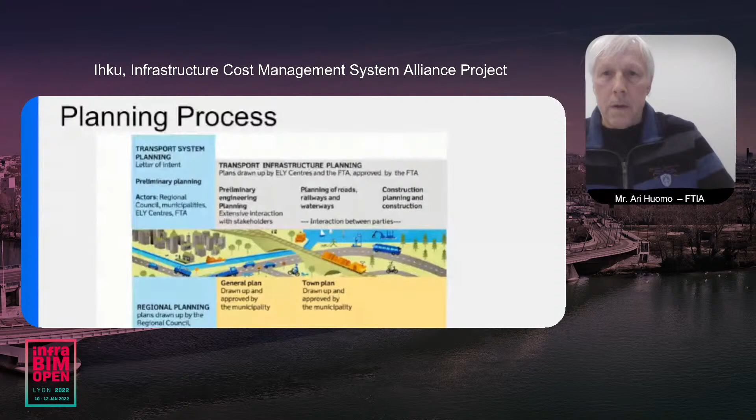Connection is not the best at the moment. Doesn't know how to put down his video. Is it all right now? It's better now, yes, I think it's better now. Yes, just continue please, sorry.

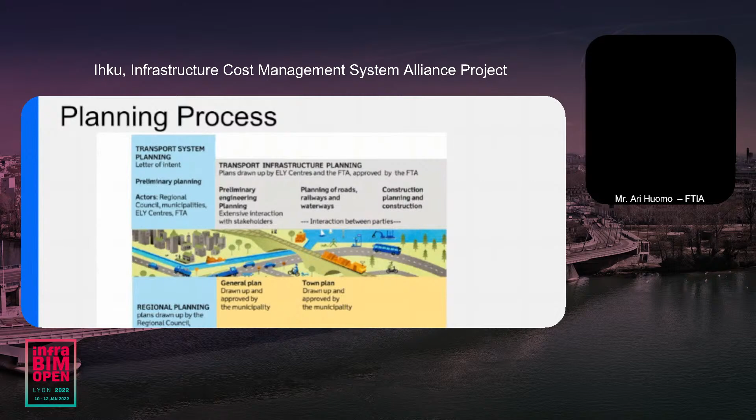I continue, yes. So we got those four phases that are separated from each other, and when we start cost estimation, we start all over again. For example, for financing, the purposes are a little different, and the initial data is a little different, and that kind of stuff. And that is one problem.

Then I go to the principles of our solution. So the first thing is that we want to have a solution that we can have continuous cost estimation throughout the whole planning process.

Structures are all based on resources that are needed to implement the project. So we are resource-based, our calculation is very strictly resource-based. And it tries to simulate how the project is implemented on site, for example, how contractors do the work.

And of course it is based on standards, for example nomenclature, so that we can have compatibility with other systems. That is very important to us.

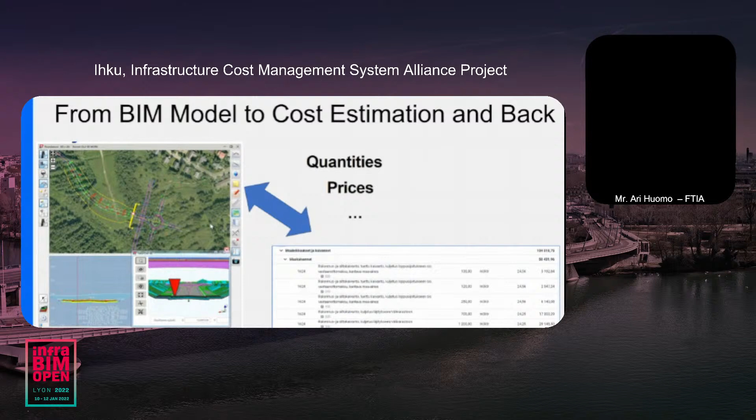On the next slide, maybe the same thing in different words. The connection to BIM models makes real-time cost estimate possible. We believe that is the way forward. We can move quantities from model to Ihku and also backward, and we can do the cost from Ihku to model, the infra-model.

And the most important thing is that this work is the standard. You've got the infra-BIM classification, the infra-BIM information format, and that is where we must have some development, especially in the data transmission format. They are not good enough, they don't move enough or exactly enough data from part to part. So that is where we work.

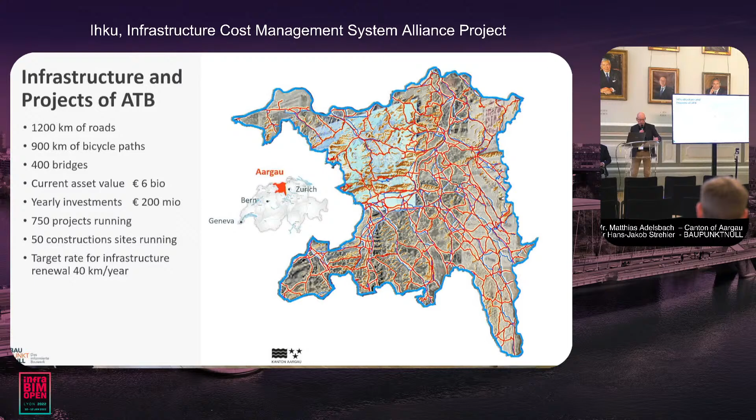This leads me to the strategic goals for digitization. One, of course, is the renewal rate, and it's one of the most important strategic goals of the ATB, and we want to significantly increase it.

But there are others. As we live in a relatively densely populated area with high traffic volume, one of our biggest challenges is to ensure we have enough qualified professionals with experience in planning and construction. Unfortunately, our culture of working together is often characterized by harsh claim management, which isn't helpful in encouraging young people to start a career in our field.

And finally, with better information about our infrastructure, we want to be able to manage our planning even better. In addition, digitally available information should help us make our construction processes and the use of resources more sustainable in the future.

In Switzerland, there's still a traditional division between planning, done by engineering companies, and construction, for which the construction companies are responsible. This leads to processes of planning and construction with many breaks in between.

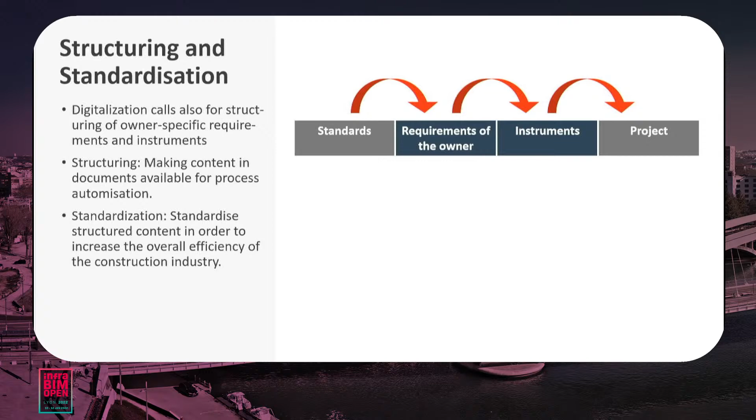To apply standards to projects in a similar way, ATB has created its own practical standards and instruments for use in project realization. For digitalization, it is essential not only to create and structure models in the sense of a 3D image of a building, but also the associated information, which probably for a long time to come is created in the form of documents—organizational charts, quality reports, or static calculations. From ATB's point of view, information from these documents should be linked to the corresponding model element. Redundant data should be avoided, and its quality should be checked automatically in a similar way as models.

ATB uses an approach in which information is divided into three levels: project, structure, and information model. Information is assigned to a level. Organizational charts, for example, are assigned to the project level and are managed there. This means they do not exist at the information level and are therefore not included in documents such as the BEP. The organizational chart is only referenced in it.

With this chosen procedure, a clarity of thought is created that allows further automation of ATB internal and project processes. From ATB's point of view, standardization serves to increase the efficiency of the entire construction industry. However, the current status is far from being sufficient for effective digitalization.

And now Matthias is taking over for the market and relationships.

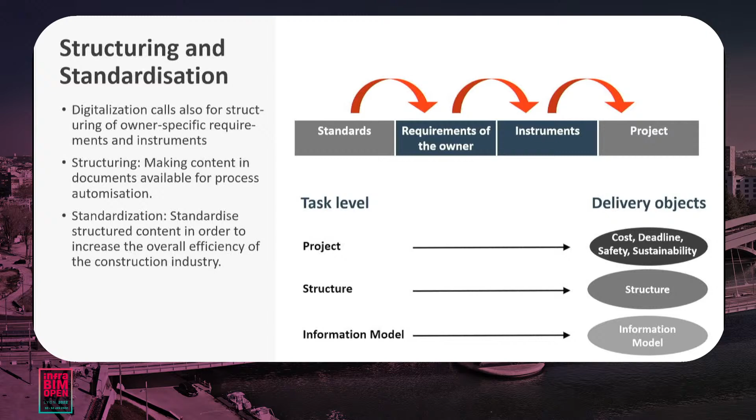Thank you, Hans-Jakob. Besides these technical aspects Hans-Jakob mentioned, there are some other aspects we have to keep in mind when we are talking about BIM.

First of all, it's the contractors. The market of contractors in our region is not very big—we have about 25 contractors working for us, almost all of them mid-sized companies. And we have about 40 engineering firms working for us in civil and structural engineering, most of them with between 10 and 30 employees.

Some of our contractors are very active with BIM. Usually these are the large companies with the necessary human and financial resources. However, there are also some small innovative companies that already started using BIM a few years ago. The vast majority of our contractors, however, are only slowly approaching the topic of BIM.

We notice mixed feelings regarding BIM. Some contractors show great enthusiasm for it, others are more skeptical. We have to take these uncertainties and fears seriously, because we cannot afford to lose many contractors as a result of BIM. A lively, competitive market must be in our interest for the future too.

There's another topic: our employees—on our side, but also on our contractors' side. Besides being attractive for companies working for us, we all have to put our efforts into increasing the number of young people starting a career in engineering or construction. We rely on them, as we need qualified people to manage all the changes and challenges we are facing, and we need them to implement BIM in the future.

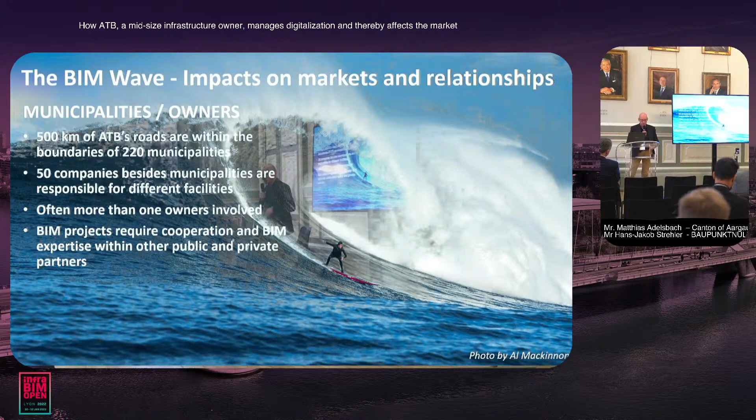So, coming to the findings, or our results so far: for a public owner, the renewal cycle of our infrastructure is important. Digitalization can help us to increase our renewal rate. Whether it will also help us compensate for the lack of qualified professionals is probably more uncertain.

BIM is just one part of digital transformation, as we have to deal with it also in other parts of our public administration.

Working on our projects for the last three years, partly with BIM, we now know that pilot projects help us develop solutions for our work cases. A fast implementation of what we have learned in our daily routine might be an important success factor.

And we depend very much on OpenBIM and a fast progress in standardization. Last but not least, the exchange of experience also with other builders will be an important topic for us in the coming years.

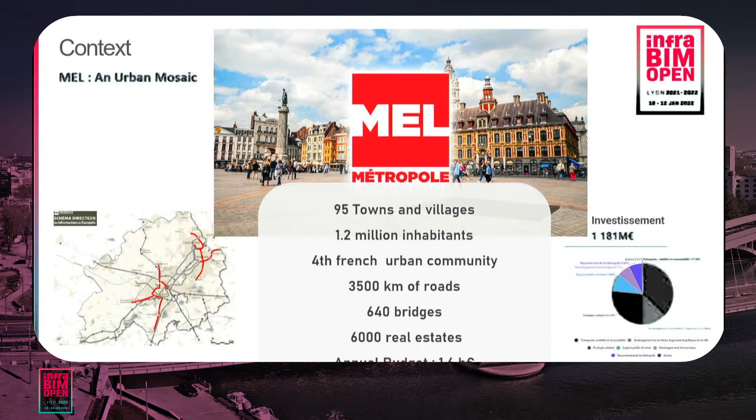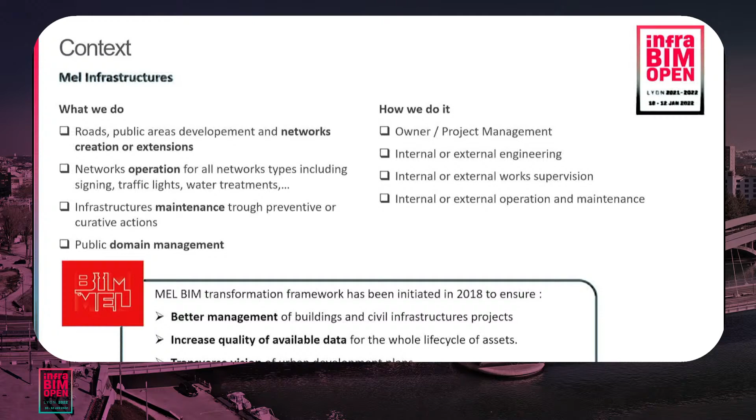For all these projects, the scope of MEL is pretty large. First, we manage roads, transportation, public areas, utilities, and public domain. So there's a large scope of involvement, and on this type of project or operation, we can be the owner, we can manage internally the engineering or externalize it. We can internalize or externalize the work supervision, and the same for operation and maintenance. So there are a lot of scenarios, and this possibility to internalize certain types of intervention allows us to test, to experiment also the BIM regarding operation, regarding engineering, and what can be the cross benefits of doing BIM at different stages of the project.

To sustain all the policies of the MEL, we adopted a BIM transformation framework called BIM MEL, which has to ensure three main features, mainly to induce a change in information management along the project and along the operation and maintenance stage. So it's better management, increased quality of data, and to also ensure a transverse vision between all disciplines, all different types of domains we intervene on.

Just a slight picture of our strategy. I will not develop it too much, but as explained by the previous speakers, this type of strategy induces training of internal teams.

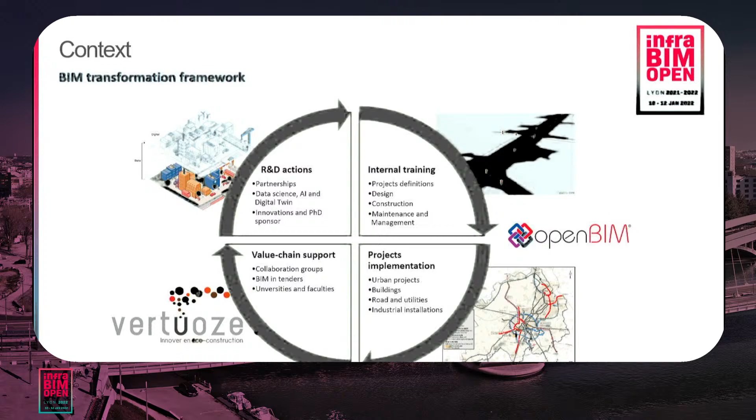So we have collaboration groups with local stakeholders. We ensure that in tenders we can mobilize expertise. And we are conducting also R&D actions like the works we are currently developing with the CSTB on digital twin or AI technology.

What kind of projects are we developing in BIM? We have currently 30 different projects. Part of this project are here.

So we have small streets, like 800 meter streets with some buildings just nearby. We have the plant, water treatment plant. We have urban projects, so the Lille Metropolis Gate. We have the Rue Solferino, which is one of the main streets of Lille city center.

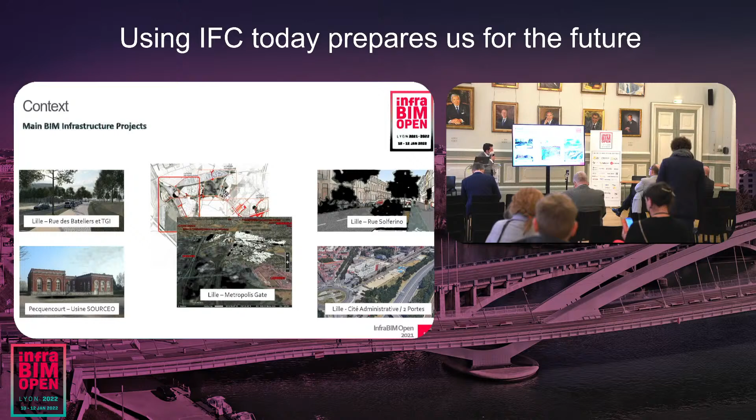And also some kind of mixed infrastructure, road and light rail project with the Cité Administrative, which is south of Lille. On all these projects, I promise my colleagues that BIM can give or can add value to their project.

We want to ensure that we have a better understanding of the existing infrastructures. We want to ensure better communication during the project process, and in the final stage of this project, we want to ensure that the operation and maintenance can have data about the constructed asset.

All these projects and the whole process we are developing is based on BIM, GIS, and all collected data that we want to make available for the project.

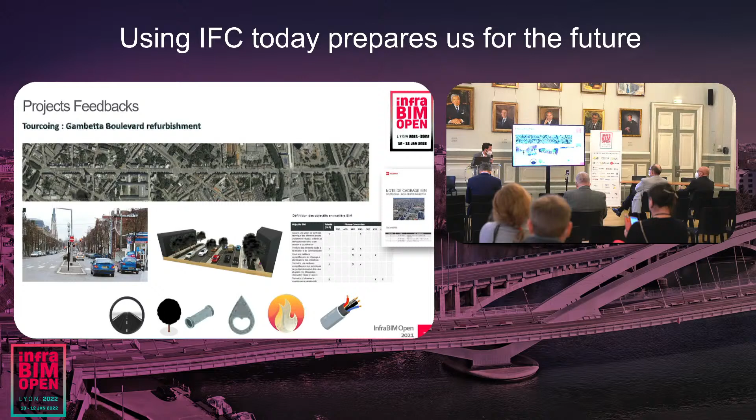Of the Boulevard Gambetta in Tourcoing, so it's one of the cities of the MEL, on which we implemented a BIM process. It's a 2-kilometer boulevard, which, let's say, traditional road improvement with a bit of landscaping, with trees, with sewage, with gas, and all utilities you can encounter in this kind of situation.

The objective of BIM for this kind of project is first decision making. In fact, when you talk with authority representatives, what they want is to decide and have a clear vision of what the project is and how the project will be once implemented. So that's what we want to manage and improve with BIM.

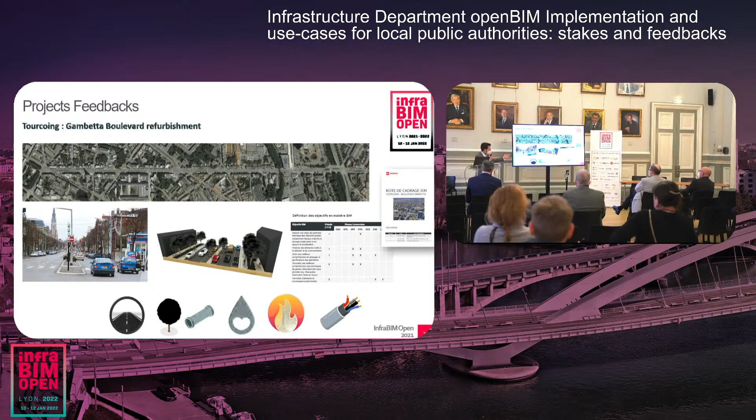Second is to manage design risks, mainly for utilities and underground structures. And then for this project, we wanted to improve the works staging and the impact of works on the actual road circulation along this boulevard.

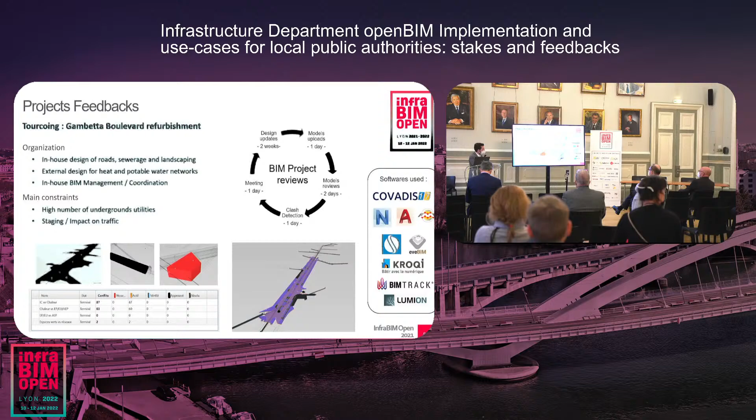To complete this project, we have also many other projects, but today I will speak mainly of this one. Just to give a slight view of the type of organization we can manage for this type of project: we have in-house design of roads, sewerage, and landscaping.

We externalized the studies for heat and potable water networks, and we ensured in-house BIM management and coordination. The particularity of this project is that internally we wanted to implement also, first, let's say, a process of BIM project reviews.

So it's not as frequent as we would like. It's only, we'll say, between 3 weeks and a month to update the models and make the coordination. But what we want is to increase this frequency, to ensure that we improve and have team learning on how to manage this data and that clashes and all issues regarding coordination are well managed.

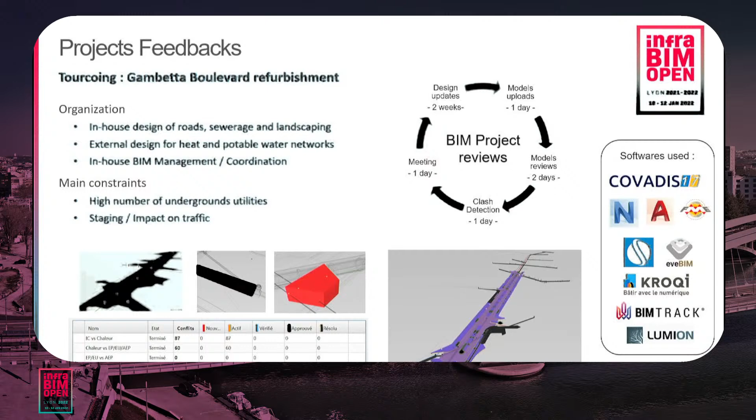We use very various types of software to ensure that. I will talk about GIS and BIM and then about asset data. First, about existing conditions and data collection.

The truth is that as a public authority, we have a large set of data that we can mobilize, including LiDAR, 3D meshes, and we have the possibility to acquire a lot more data. So data is not a problem in the sense of existence of the data.

The problem is when you want to use this data and when you want to have ready-to-design data. In fact, what we see is that more data doesn't mean more accuracy. The input quality and the use case defined when you acquire this data is very important.

And most of the time, if the use case is not well defined in advance, in fact, the data will be of no use, or only to ease early stage studies.

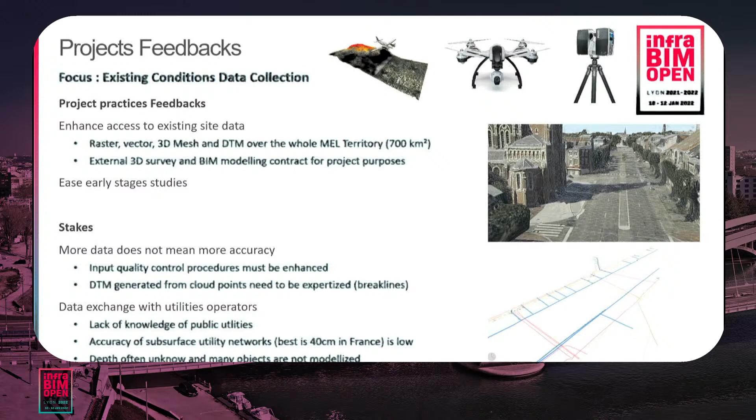And then the last issue is the cost. Sometimes acquiring data, especially complex data, is very costly. So if we make the acquisition, we want to give value to this data and ensure that we will not acquire the same data one, two, or three years later on. So it has to be capitalized.

Next subject, the link with GIS. Historically, metropolitan authorities in France have collected a very large amount of data, and now we have to think about how this system can evolve, to ensure we can use their data in our design or project management, and in return, how we can give them back our data.

The truth on this point is that import and export are both possible, but very tricky each time. If you want to import data from GIS into BIM, you will really decrease the level of structuration of the data when you make the export. And then you are not very sure that you will be able to give back the same information to the system. So we have this kind of problem with water utilities, for example.

What we would like is to be able to manage some kind of temporary GIS references between the objects, and to make this whole system truly linked, and truly viable over time in terms of the life of the data.

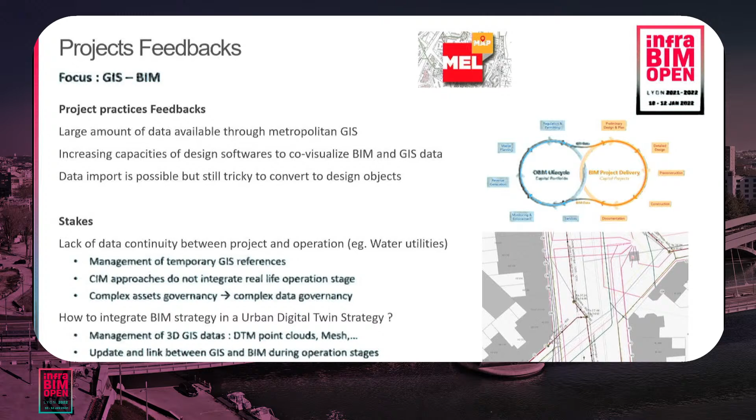The next and last feedback I would like to make is on asset data. What we have encountered in terms of project management, outside of the format and IFC used on our project, is that what we miss most is the language and the property sets to be implemented in our models.

We need this, and that's a word we conducted an experimentation on with CERIB on this project. I think Rémi Lanois will give a presentation specifically on this subject later on. What we experimented with is that we need more data and more links between existing product properties and our models.

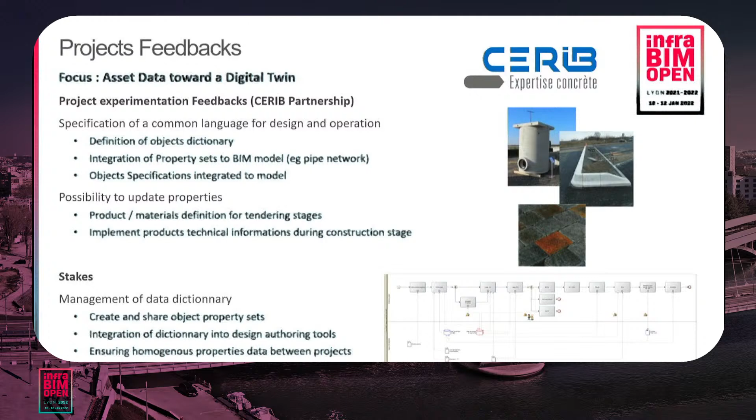For sewerage and water pipes, all these products come from manufacturers, so they have all the data. What we want to do as an owner or tenderer is specify a product, and in return, at the end of the project, retrieve all the data from this equipment. Today the main authoring tools are able to do this manually. What we would really like in the future is to link this authoring tool, like Covadis, to Civil 3D and other design software, to have these kinds of objects, property sets, and data dictionaries, and to add data and add value to our models. That's a key point for being able to move to the maintenance and operation stage.

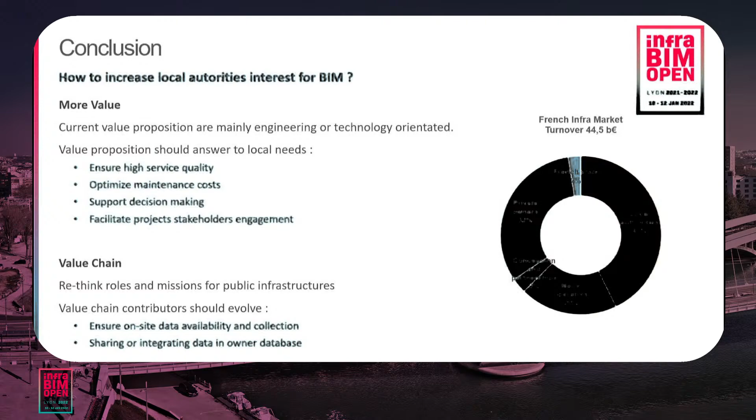So, a first point of conclusion on these subjects: I'm often asked how to increase local authorities' interest in BIM, and why so few cities and metropolises are interested in infrastructure, and how BIM can be adapted to our context.

From our point of view, the actual value proposition presented by designers and software vendors is not sufficiently focused on regular client needs, because that's what we are. We represent about 50% of the French infrastructure market, so we don't have mega or very large projects every day, but we are the day-to-day business, and small projects are often conducted by local authorities.

What we want, in fact, as public authorities, is to ensure high service quality, because that's what we have to manage for our citizens, to ensure that their bike, that when they walk in the streets or drive, in fact, that the infrastructure is in good condition, or when they take the metro, for example.

A very specific criteria is on how to optimize the maintenance cost, because if you know better your assets, you will have a good investment on the actual condition and actual asset. And then it's how to support decision-making, how to facilitate the stakeholders' engagement and the citizen engagement. So these three items are really what we want and how we want to work with the engineers, with the design teams to make more value of BIM for our authorities.

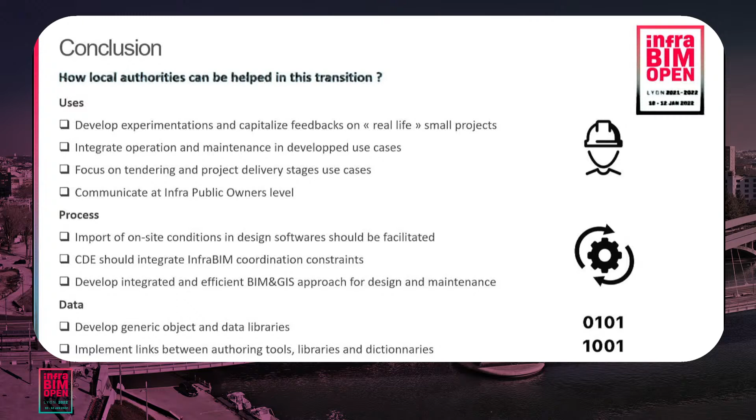OpenBIM and BIM in general promise unique, unified, and reliable data, collected and easily shared with all project and asset stakeholders. So yeah, that's a promise. And tomorrow, I would like to be able to respect this promise, the promise I made to my colleagues. But we still have very big challenges to overcome. BIM for infrastructure still is, and is already, possible for our authorities. I thank you for your attention and am available for your questions.

The title would be "The race to support a better information flow on infrastructure works is approaching the finishing line." So it's hard to introduce these two people who are going to present, because I think quite much everybody already knows them.